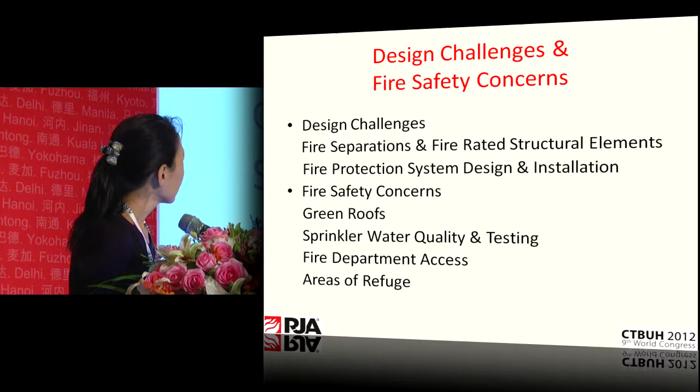Here are some highlight features we identified when talking about building design. First is the design challenge: fire separation and fire-rated structure elements, fire protection system design and installation. Green roof is one topic when talking about green buildings, which also brings green energy saving, sustainable design, sprinkler water quality and testing, fire department access, and area of refuge. This is some features we put as examples when talking about building design. All this has to be considered when we lay out the design.

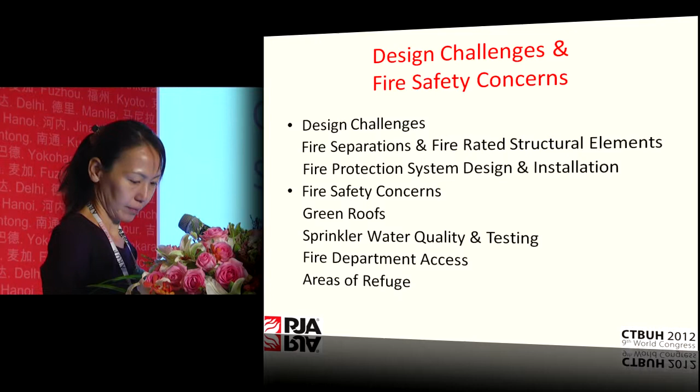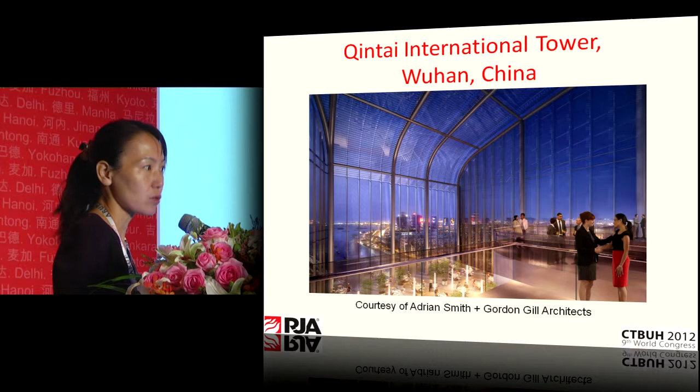This is another picture showing a typical office building with super high rise. In China, when we're talking about building height, we define different groups. For buildings over 24 meters, it's called regular high-rise buildings. When a building achieves 100 meters, we're talking about super high-rise, which means additional fire protection features have to be added, such as

helipad access and area of refuge, which somebody will be talking about in particular, but we will address that as well in this topic. Today we're talking about buildings over 500-600 meters, mega-size or super high-rise buildings. That brings another challenge regarding how to do code compliance even in China, and some international practices we can add as experience and benefit to consider for building design in China.

This is about normal building design, just complying with the China code. For large buildings, super high-rise, people want to still enjoy and be well connected to the environment. So the architect has to think about how to make the super high-rise building still feel like people are part of society. Large open spaces create a lot of glazing materials - people can actually enjoy the view they get, but also feel like they are not isolated in the super high-rise building.

And also the mixed use separation. For the building we defined as a vertical city, you have to create a self-sufficient structure. That means you have all the different occupancy usage to support the building. People live there, work there, and they feel like they don't necessarily need to go to other places to get things done if they just enjoy the entire building as the building city.

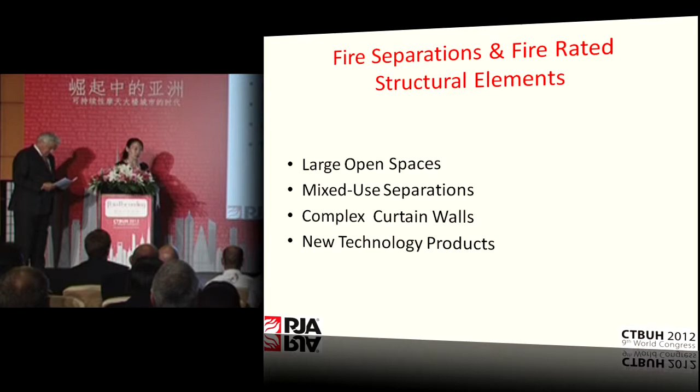Today we see a lot of buildings surrounding this area with super high-rise design. They use the curtain wall glass materials, which somehow brings debate as well, not just fire life safety, also the lighting pollution. But it created the modern society feeling of the high-rise buildings and the weight. So glass glazing material actually brings a lot of benefit when we're talking about green buildings.

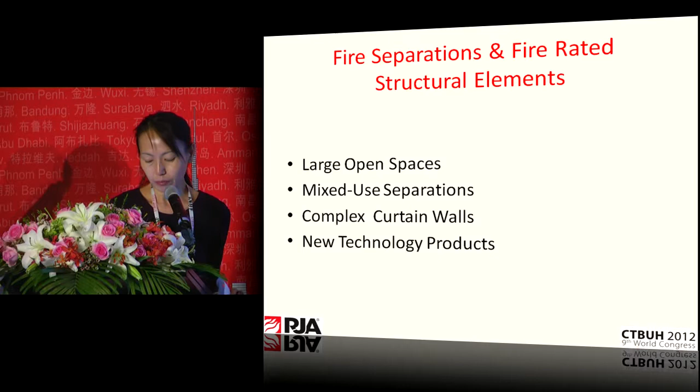And the last thing, which is very important: with the building height seeming to go higher and higher, a lot of new technology products have to be developed to support the building.

One example I'm talking about is the Masdar corporate headquarters, built in the Middle East, in the desert area. This building particularly is for energy saving, and they're talking about zero energy consumption, which is a very unique topic. They use a lot of glazing material, creating a very translucent feeling for the occupants there, and also the guests when they see the building. It has very unique features, with different elements creating different zones and supporting the roof structure, but it brings a lot of challenges, which are very common issues when we do fire life safety around the world.

First is large open space separation. For some area with high fuel load, you don't want it to be on the same level as some of the light hazard areas. So certain appropriate fire separation has to be identified and achieved.

And the natural lighting transfer - because this building uses the energy saving concept, you want to use less and less actual human-added elements, just to try to keep the building as natural as possible, to keep the energy saving while still making the building function, no matter the HVAC system or the fire protection system.

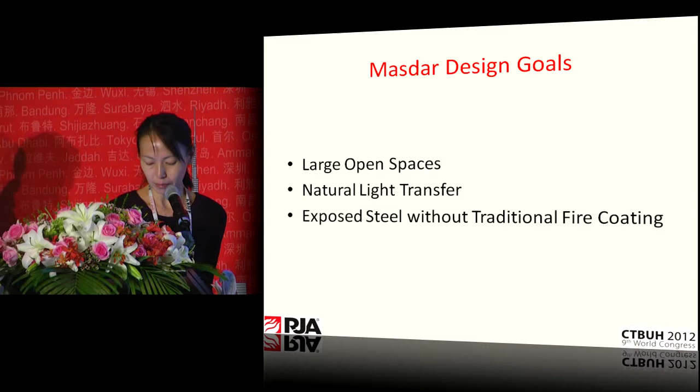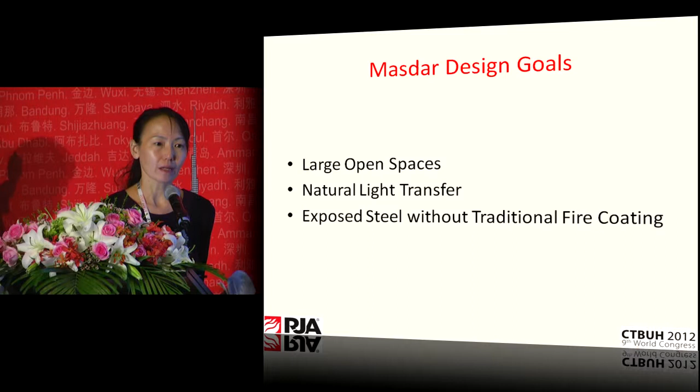And there's a lot of steel structure used in this building, but also the fire challenge regarding how to protect the steel structure becomes a concern.

For this building, a very hot topic is using the performance-based design approach, which has been identified and proposed in a lot of unique buildings around the world, and has been practiced in this building's design.

First of all, we have to consider what's the worst case scenario, which actually brings conservative design criteria, but also not over-conservative. That's why we define the credible fire scenarios.

And also, when we're talking about this building proposed with sprinklers, what are the benefits of sprinklers put in? Because in that area, for the desert, we're talking about energy saving, the sprinkler system becomes very, very important for protecting the building.

Also, how that's related to how we define the fire size. For example, in Shanghai, we're talking about if building ceiling height is over 10 meters, actually the sprinkler cannot work well for suppression and control of the fire. So when we're talking about fire size, we actually don't consider the sprinkler effect on the fire. So that's a different criteria if we use the building in another place.

What the fire department or building official feels comfortable with, if we add some of the benefit, considering other system interactions with certain features. And atrium space geometry - how that's related to the fire separation if you want to use the firewall or fire shutter.

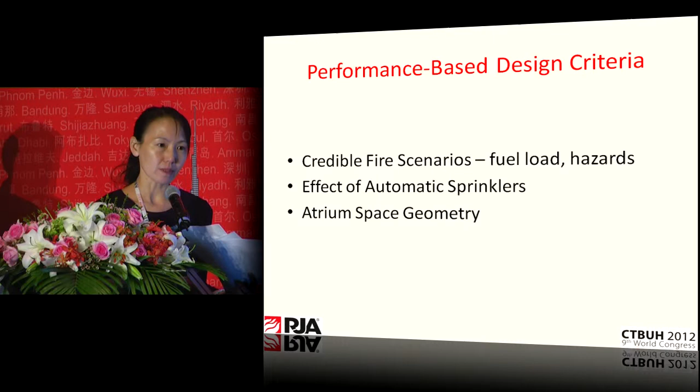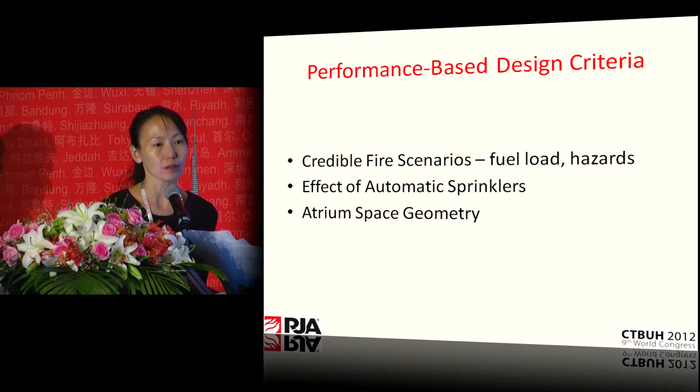In China particularly, the challenge would be the fire separation defined by the different occupancies, actually achieved by the floor area, which means no matter what the function would be, a certain fixed floor area has to be counted when you do the maximum fire compartment size allowed in the building code.

We use a lot of fire modeling to support this building, actually end up using natural smoke venting instead of mechanical smoke exhaust. The simulation was used to develop the trial design towards the final design criteria.

People always worry about whether natural ventilation works well in high-rise buildings, because of factors like environmental and wind conditions, and what climate situation will impact the exhaust system. That means when we talk about natural ventilation, we're always concerned whether the buoyancy from the smoke generators is adequate enough for the smoke to be exhausted without a mechanical smoke exhaust system.

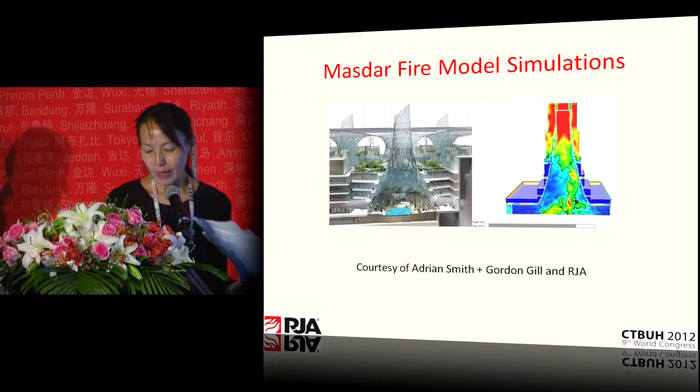So we created different levels of air supply to create a very positive air supply direction to show the design actually works. With certain levels, the fire protection engineer team worked very well together with the mechanical engineer to do the simulation, and the final result was presented to the building and fire officials to get approved. So that's one of the achievements done for this building, for the natural ventilation.

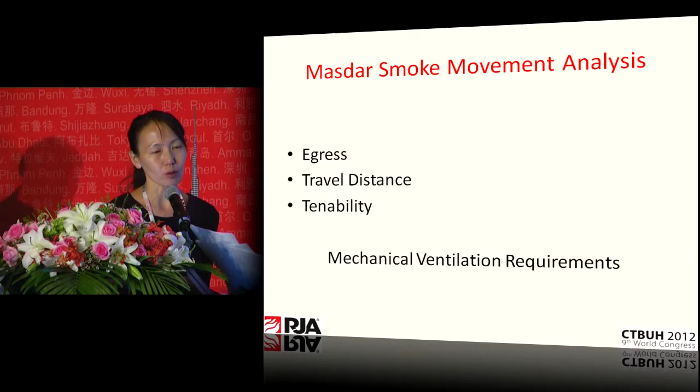And also the egress, travel distance, and tenability. A lot of international criteria has been applied in this building, but we also have to consider different local codes and what their specific requirements are, which will hold true for the code official - they think it's more applicable to that region. So international practice plus local practice worked well, but we have to show it's not just a general approach applied everywhere for a certain project. It all depends on the unique features and local practice, what product, what system, and also what firefighting techniques will be used in the building.

And now I'm going to hand it to Mickey Reiss to give the rest of the presentation.

Okay, thank you, thank you Fang. Fang is always a very difficult act to follow because she is so smart and she makes everybody else look good at RJA.

Another challenge in super tall buildings, which is a challenge in regular buildings as well but even more so in super tall buildings, is the fire protection systems design and installation. When you look at the fire alarm, automatic sprinkler, and smoke control systems, you have to look at it from the overall system right down to individual device placements.

For example, if you have obstructions, particularly in open areas with a lot of glass walls, it becomes a placement issue - it becomes an issue of looking at glazing locations and how you will protect them, not only with detection, but special sprinkler systems to work with them.

Super tall buildings have also introduced new applications that never occurred before. Wind turbines now we're starting to see in many buildings. They bring specific challenges of their own. You have to isolate the turbine, usually with fire-rated construction from the rest of the building to provide some sort of isolation, but at the same time you want to provide access for the fire service to get there if they have to.

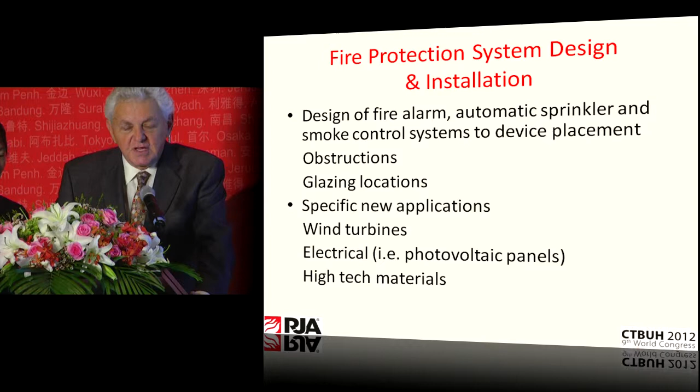So these are additional installation challenges. Photovoltaic panels - electrical power shutdown and power, and access for fire service - are also additional issues that have never occurred before. And finally, high-tech materials that are being used. These are all new types of materials being used today that probably have not been thoroughly tested. For example, when you look at double-wall construction with insulation, there are certain materials there that provide very, very good energy factors, but are very, very poor fire rated. So these are balances that need to take place.

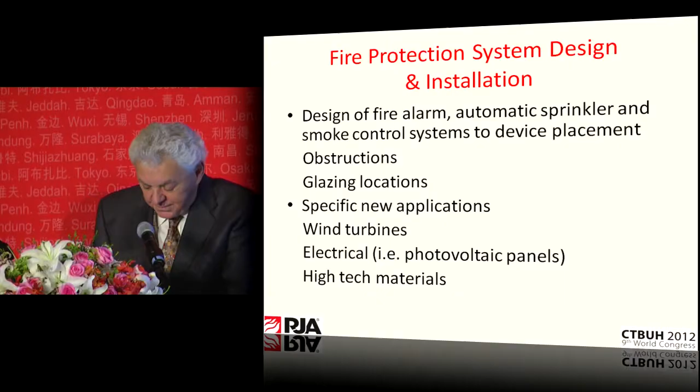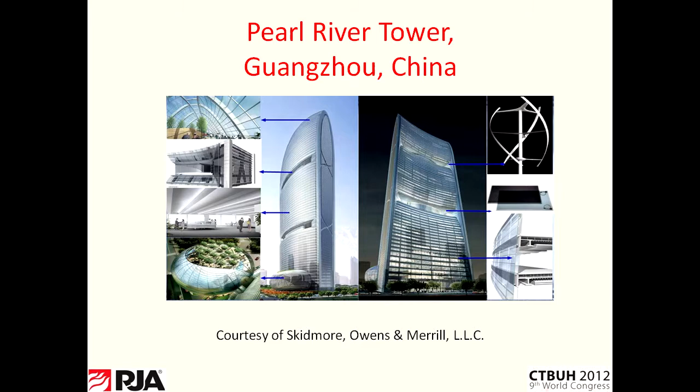The Pearl River Tower in Guangzhou is an example of bringing a lot of these new concepts together. You can see in the upper right-hand corner the wind turbine, the photovoltaic cells, the double wall construction - all the issues that typically will occur that would bring in fire challenges.

The Pearl River Tower was very interesting. The owner on that happened to be a cigarette manufacturing tobacco company, and they wanted a green building. Somehow there was somewhat of a disconnect on our part, but when you're looking at a tobacco company in a green building - they looked at it to be the first one in the Pearl River Delta, plus also the ability at that point in time to advertise it for higher rental space in the floors that they were not occupying themselves.

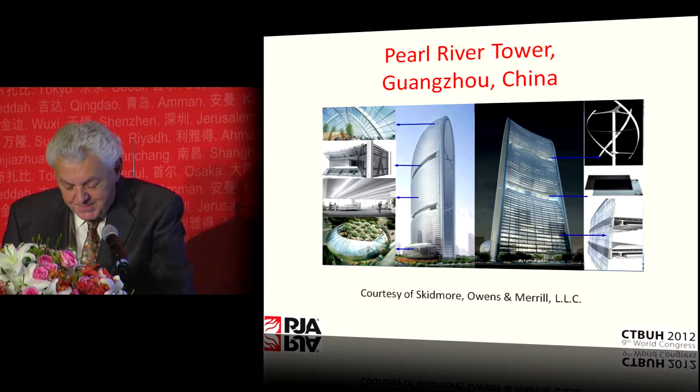In addition to those two challenges we talked about with fire separations and system installation, there are a few other fire safety concerns. These don't directly impact the fire design, but they do impact the rest of the building design from an overall approach of how they may have some relationship to the fire issues.

For example, green roofs has been a big thing. It's been going on for a while. We have to recognize that the foliage up there is a fuel load. And if it's not properly maintained and they tend to dry out, now you're having situations where you're going to have a fire hazard, where you're going to get fire and smoke potential because of their fuel load, and that smoke and fire can spread to adjacent buildings.

Roof evacuation, for example, in China, as Fang mentioned, they require helicopter evacuation on a building. Whether you actually will do it on a super tall building or not is really not the point, but the fact is that if there is a fire up there on the roof, you're not going to be able to land a helicopter.

Another issue is sprinkler water quality and testing. In order to conserve water, people are looking at using rain or gray water. This can create all sorts of issues. For example, in steel pipe sprinkler construction, you get what they call MIC buildup and corrosion, and this has to be watched carefully. Also, you want to make sure you do your periodic water flow testing to make sure the system is working properly, rather than try to skip it for water conservation.

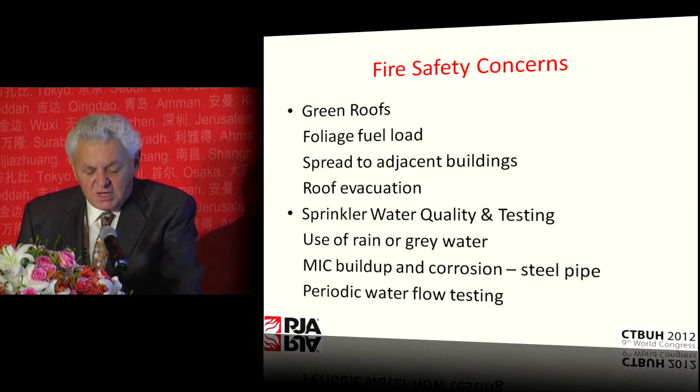Another couple of concerns we have are fire department access. Because a lot of these green buildings are done with beautiful glazing and green areas around them, there's limited access space. So the fire department tends to get a little bit concerned when there are overhead clearances and canopies around the building for shading purposes, particularly in warm climates, because it prevents their ability to see, access, and visibly determine what's happening in the building.

It also creates issues in many cases with glass debris coming down, where they're going to have their staging areas. And the sunlight reflections become an issue.

I don't know if many of you are aware, but just recently in Las Vegas, in one of the new hotels built in this new city center, they found that at a certain time of day, the light reflecting off the curvature of the building acts as a lens and is starting fires down by the pool area. So you need to be very careful and look at the total picture and the surroundings, particularly from the fire department's point of view, because these are issues that are generally not thought of, but it can sort of ruin a good relationship with them if they're not considered.

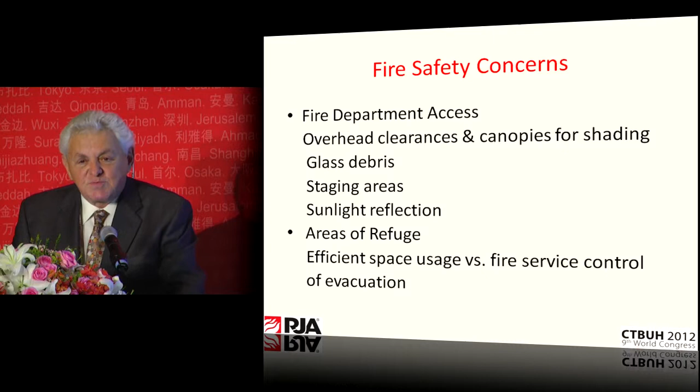Finally, areas of refuge—that is a very interesting area. I'm actually going to defer any discussion on this to Dan O'Connor, who's going to be giving the third presentation today in more detail on this. But it's a very controversial area. It's not generally done in the United States, but it is done here in Asia, particularly in China, Hong Kong, and Macau with their codes. So it has pros and cons, and I think those need to be discussed thoroughly.

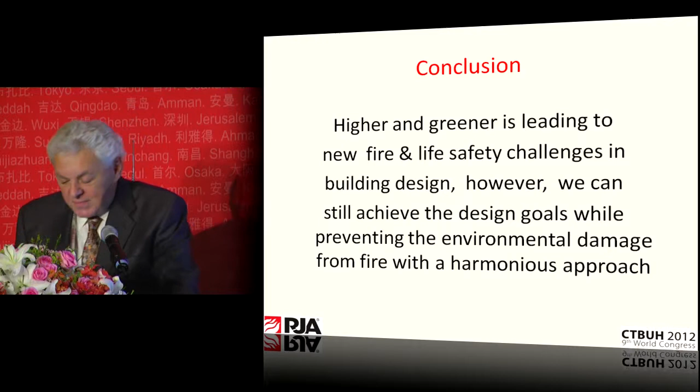This is another one of the high-rise buildings that typically get the challenges we've talked about. And finally, in conclusion, higher and greener is definitely leading to new challenges in building design. But even though fire safety is not a key issue and does not give certification credits for what it does, the whole point is good fire and life safety design can help architects and designers achieve their goals while continuing to make the building safe going forward. And with that, the note is we've just run out of time. Thank you.